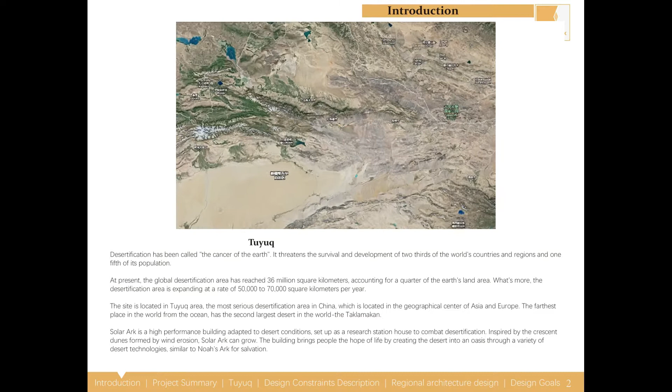Desertification has been called the cancer of the earth. It threatens the survival and development of 2/3 of the world's countries and regions, and 1/5 of its population. Our site is located in Tuyuq, the most serious desertification area in China, which is located in the geographical center of Asia and Europe, the farthest place in the world from the ocean. It has the second largest desert in the world, the Taklamakan Desert.

Tuyuq is the most mysterious place in western China. It's the intersection of many famous religions, history, and culture in the world. It's named famous village of China history and culture, and the oldest existing Uyghur village in Xinjiang. Sunshine is abundant. Heat is abundant, but extremely dry. Rainfall is scarce. Here are some pictures of Tuyuq. These are some industries, environment, culture, and animals in the desert.

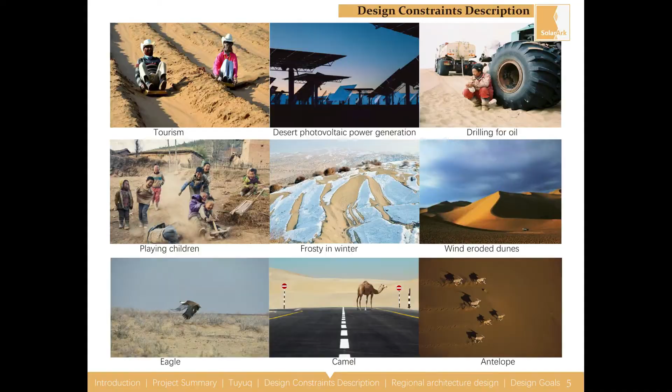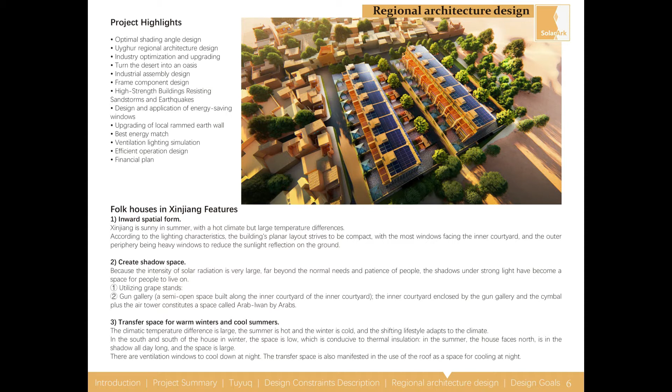This design aims to provide a solution strategy for extreme desert climate conditions and an example of sustainable architecture in desert areas. To develop desert cities and make full use of desert resources, and to adopt a variety of building techniques to avoid the adverse effects of desert climate.

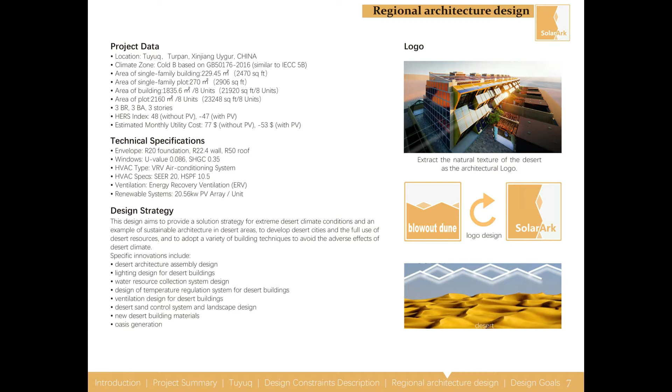Logo generated from extracting the natural texture of the desert as building facade, which comes from blowout dunes formed by wind erosion. After 90-degree rotation, the wave-shaped facade of the building is obtained, which can realize self-shading in summer and sufficient sunshine in winter, with both form and function. The goal of the design is to meet the requirements of the Solar Ark, like the camel, the shape of the desert.

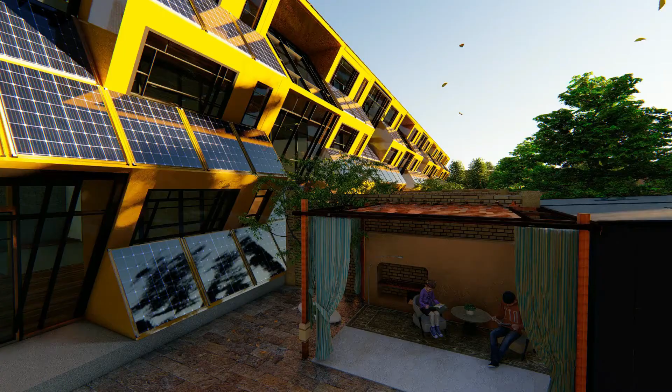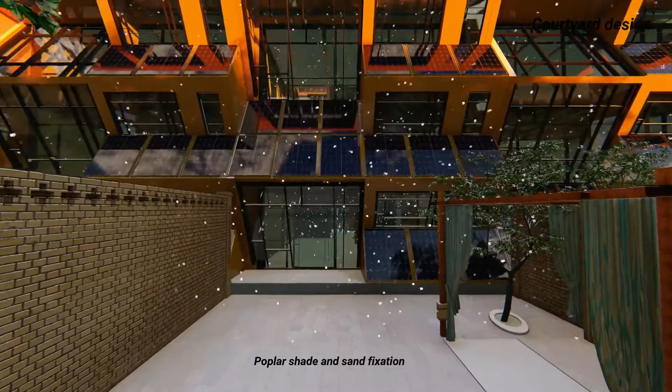Architecture. The vineyards in the courtyard satisfy the local people's living habits. People can barbecue and enjoy the cool air. Mulberry and poplar are planted in the courtyard. They are the original local trees. Poplar has a good effect on resisting sandstorms. The luxuriant branches and leaves of mulberry can provide shade.

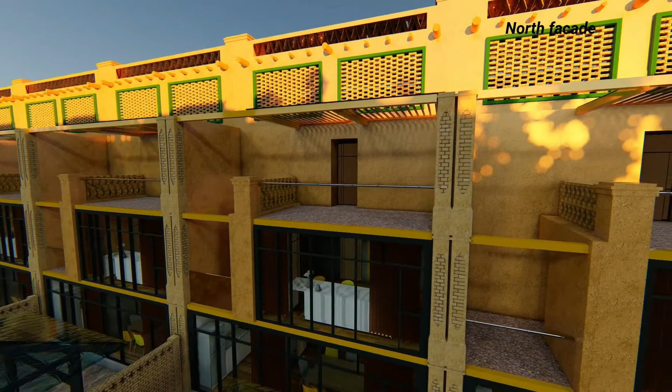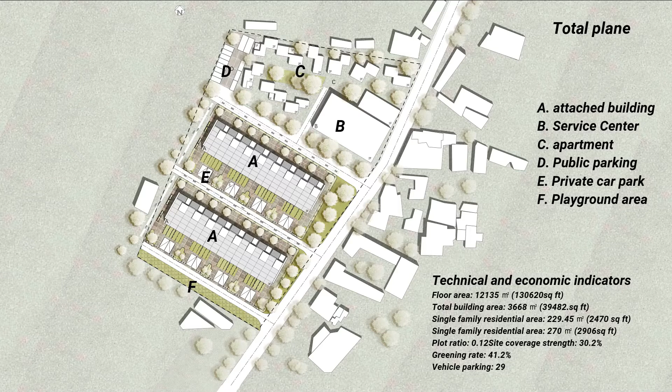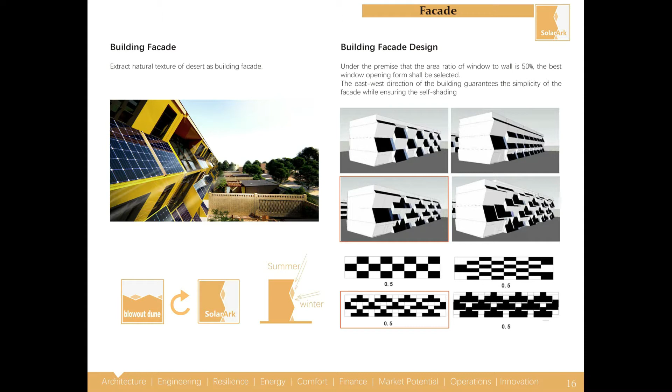A. Attached building. B. Service center. C. Apartment. D. Public parking. E. Private car park. F. Playground area. The natural texture of the desert is extracted as the building facade. The facade is designed to keep the building simple while ensuring self-shading.

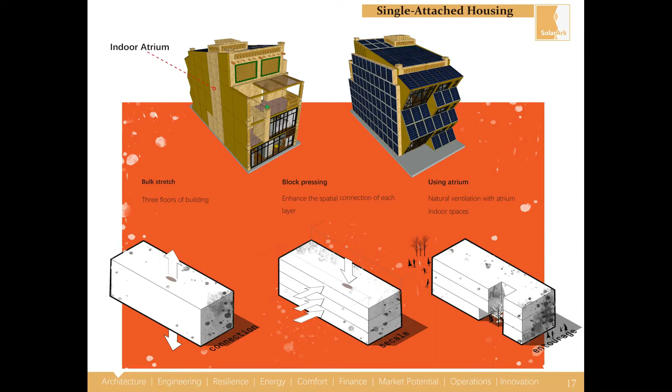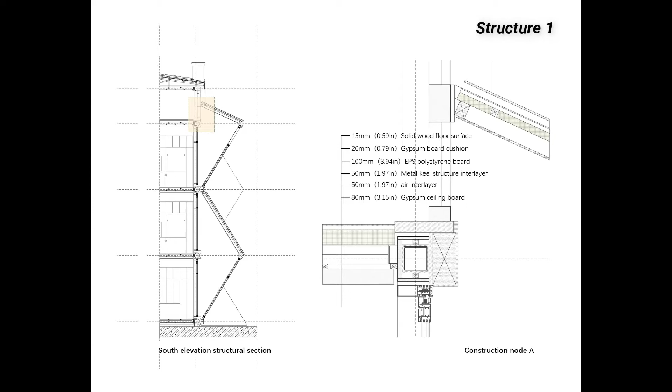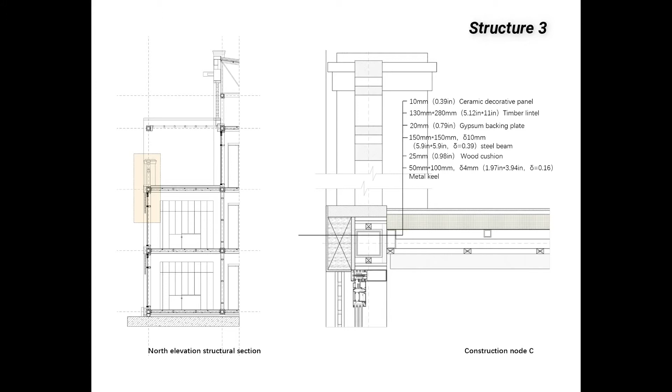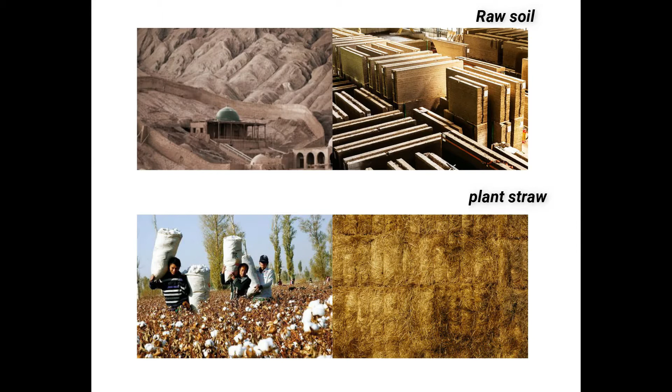Engineering. The main structure of the building adopts a steel pipe. Composite structure is used at its external interface to realize heat preservation and protection, as well as the connection of the complex south facade. And we choose the locally rich raw soil as the building wall material. This material is convenient and low cost, but its bending shear capacity is poor. The improved rammed earth wall has good practicality.

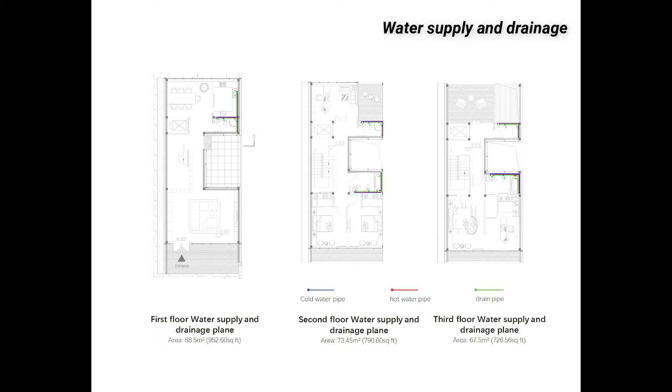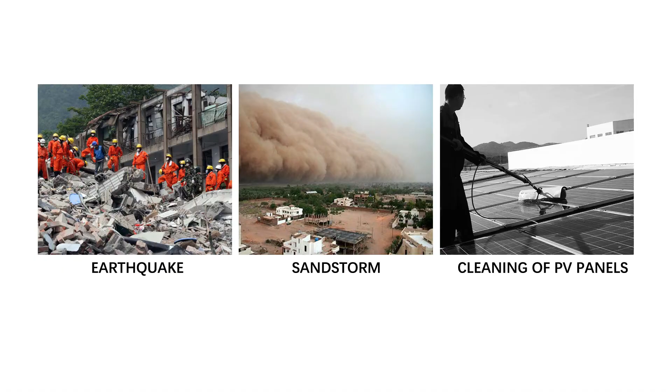Resilience. As for the elastic design of the building, we mainly consider the impact of earthquake, wind, and dust storm on the building, as well as the cleaning of PV panels. The frame member is a patented product developed by us for structural instability in earthquakes. Its strengthening effect on the structure has been demonstrated through many actual projects, and it has the characteristics of lightweight, high strength, and good stability.

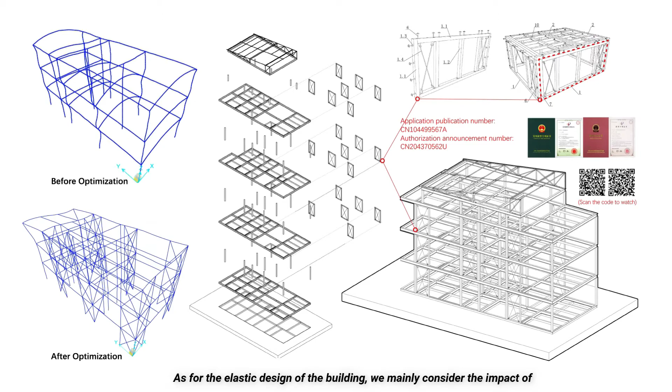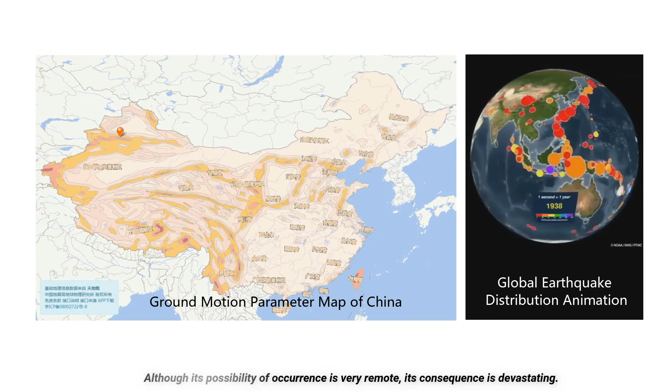The primary risk that our building may face is the seismic risk. Although its possibility of occurrence is very remote, its consequence is devastating. Therefore, we conducted structural analysis to evaluate the building's ability to withstand and recover from seismic activity using the commercial FEM software SAP 2000.

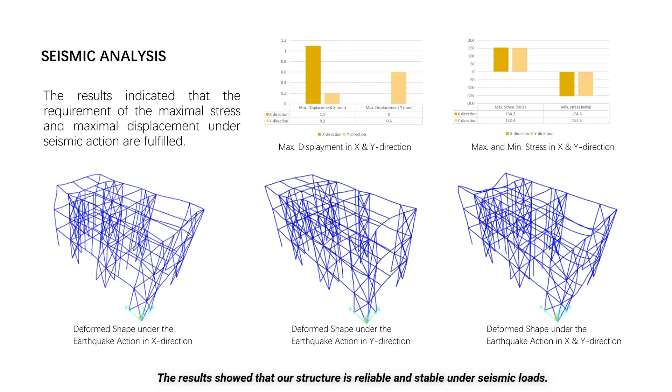By building information model, we can coordinate architectural design with structural design. SAP 2000 can automatically calculate the seismic loads based on the input parameters. We applied the seismic loads in X and Y direction, and their combination, on the steel frame model respectively. The results showed that our structure is reliable and stable under seismic loads.

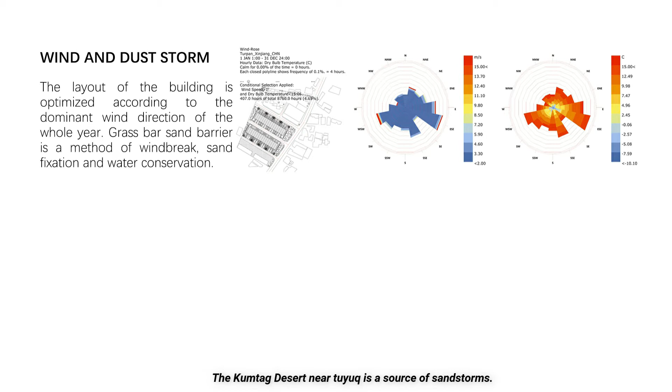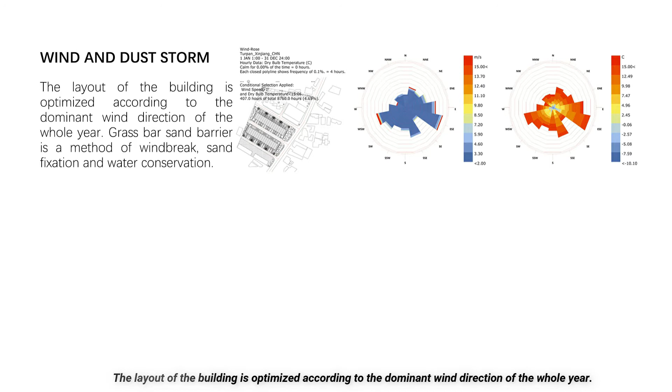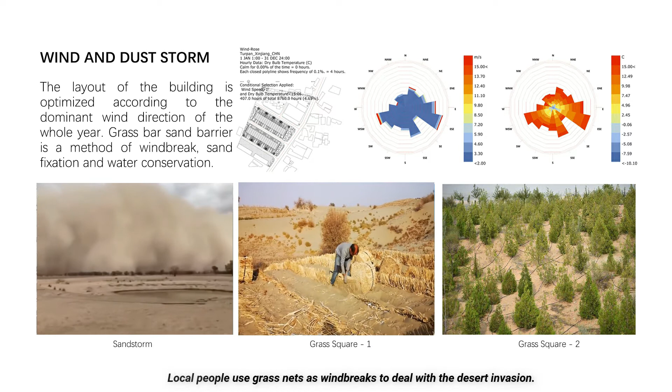Due to its unique geographical environment, northwest China is a sandstorm-prone area. The Kumtag Desert near Tuyuq is a source of sandstorms. The layout of the building is optimized according to the dominant wind direction of the whole year. Grass bar sand barrier is a method of windbreak, sand fixation, and water conservation. Local people use grass nets as windbreaks to deal with the desert invasion.

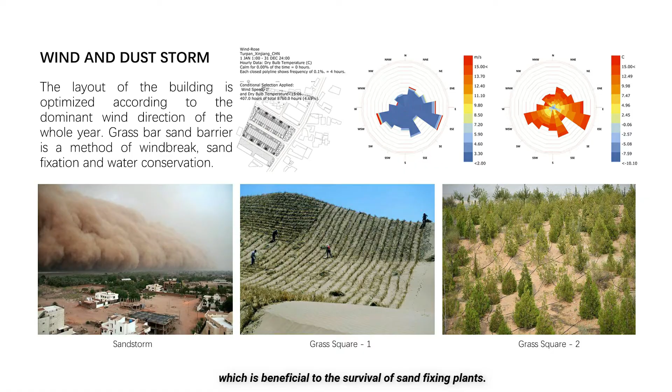On the one hand, it can make the ground rough, reducing wind force and wind erosion. On the other hand, it can retain rainwater and increase the water content of the sand layer, which is beneficial to the survival of sand-fixing plants.

Wind is an important external factor that influences the building's performance. The wind load is applied along all external columns of the frame in both X and Y directions. Furthermore, dead loads and live loads were also applied on the structure to simulate a normal occupied state of the building. The result indicated that the maximal stress along all beams and columns won't exceed the yield stress of the selected steel grade, whether the wind load is in X and Y direction, separately or combined.

In the desert environment, the dust adsorbed on the surface of PV panels easily reduces the system efficiency or even causes failure. In order to maintain the operation of the system, we designed several cleaning and maintenance methods that are easy to operate manually.

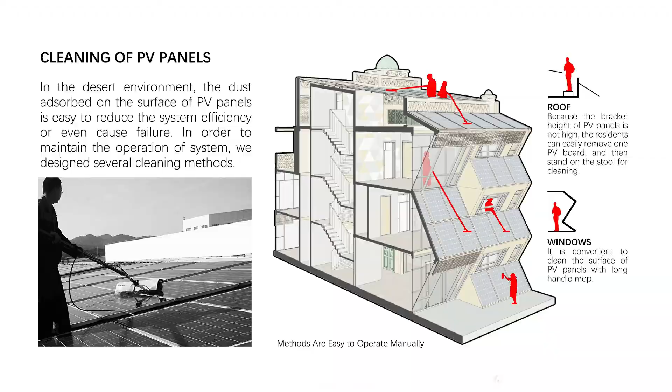Energy performance. Due to REM/Rate software can't set the project location as a non-US town, we refer to Wendover in Utah, US for HERS index calculation. The climate of Wendover is similar to that of Turpan.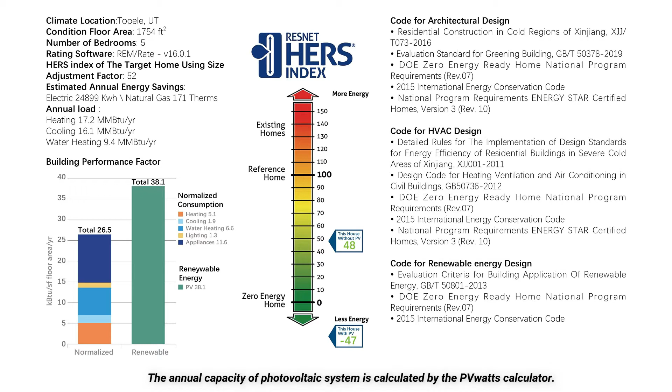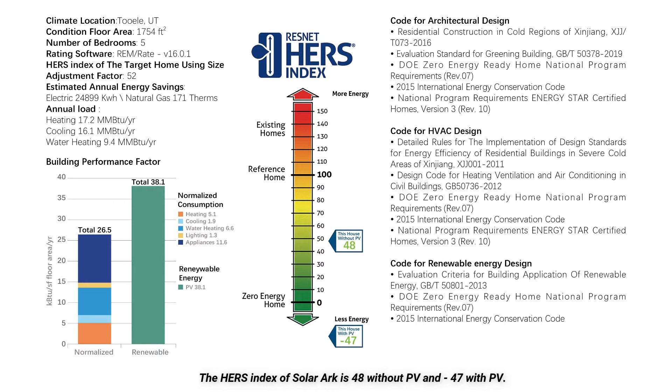The building envelope and HVAC design meet the requirements of DOE Zero Energy Ready Home National Program Requirements and local building codes. The annual capacity of the photovoltaic system is calculated by the PVWatts calculator. The HERS index of Solar Ark is 48 without PV and -47 with PV.

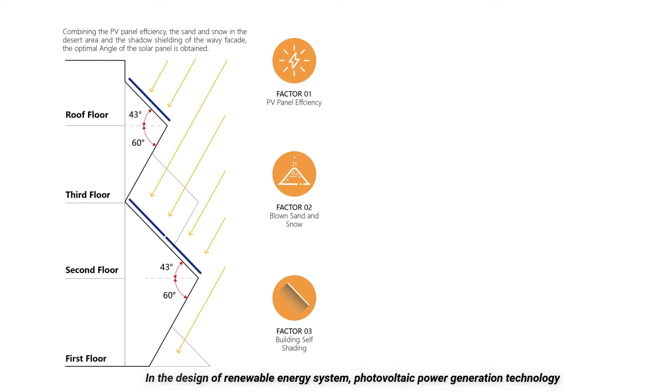In the design of the renewable energy system, photovoltaic power generation technology is adopted in Solar Ark, and an off-grid system is preferred. In the early stage of the scheme design, we determined the optimal inclination angle of the PV panel from three aspects: maximum capacity of the off-grid system, prevention of sand and snow accumulation, and self-shading of the body, which was verified by software simulation.

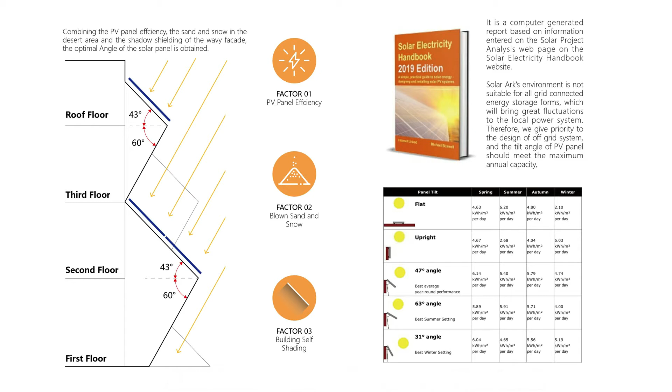It can be seen that the undulating facade can achieve self-shading of the body on the summer solstice, while the maximum area of solar radiation can be obtained on the winter solstice.

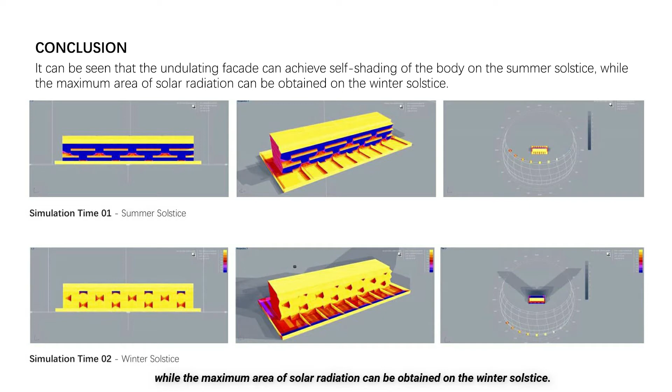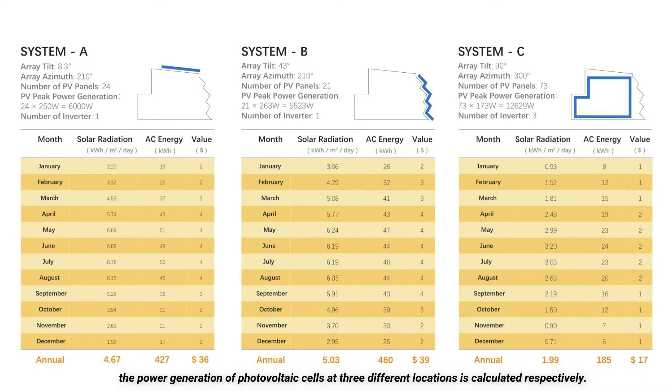Using NREL's PVWatts calculator, the power generation of photovoltaic cells at three different locations is calculated respectively. The PV system diagram is as follows.

The surplus power can be stored in the battery, can also be used to charge electric motorcycles or cars, and provide power for surrounding communities.

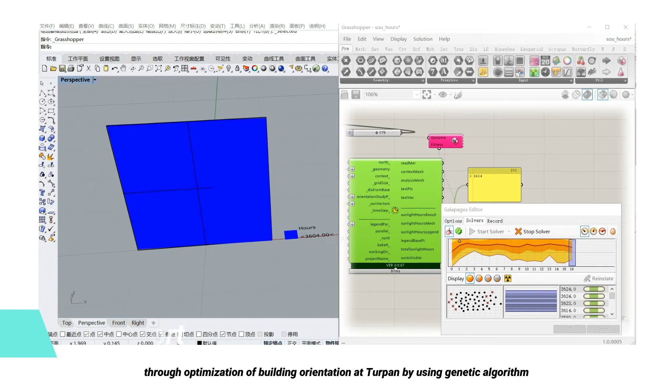Comfort. Through optimization of building orientation at Turpan using a genetic algorithm, it is found that building orienting south is best. An east-west deflection within 25 degrees has little impact on daylighting throughout the year.

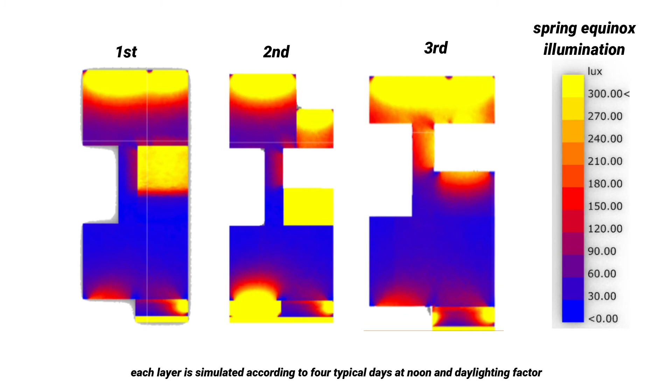Daylighting baselines of 2% daylighting factor and 300 LX illumination are developed. Each layer is simulated according to 4 typical days at noon and daylighting factor, on a work plane at 0.75 meters, to guide the architectural design scheme.

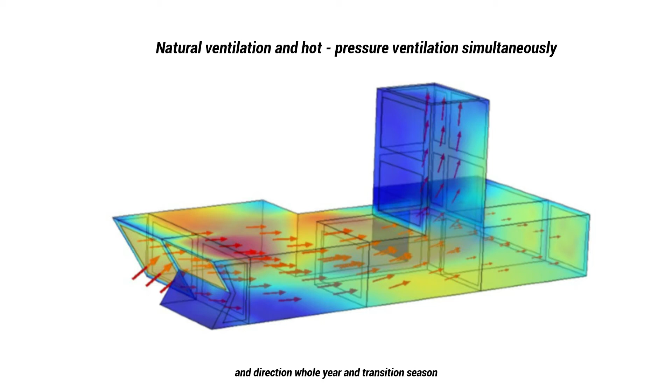Through ventilation simulation based on the dominant wind speed and direction throughout the year and transition season, suggestions are provided for the architectural design scheme and the interior space layout.

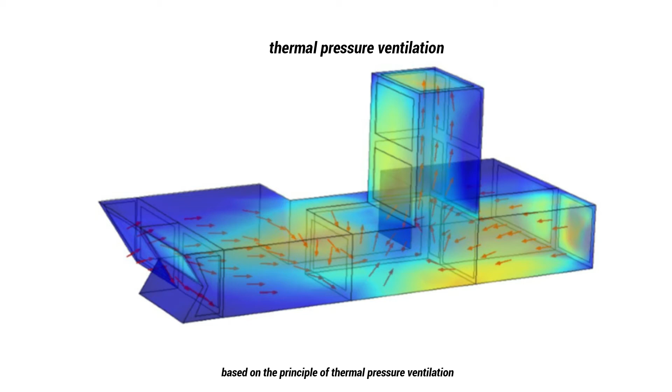When outdoor wind speed is relatively small, based on the principle of thermal pressure ventilation, the atrium drives the airflow in the surrounding rooms. After optimizing the indoor comfort from the perspective of design, air conditioning equipment is selected to further regulate the indoor temperature.

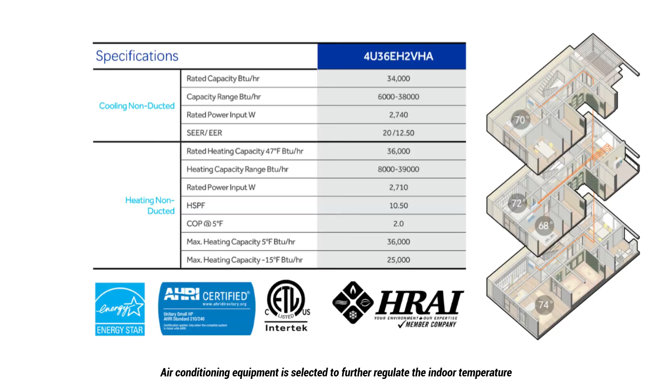Selection of equipment is preferred to use products certified by Energy Star. Indoor temperature is controlled between 18 to 25 degrees throughout the year.

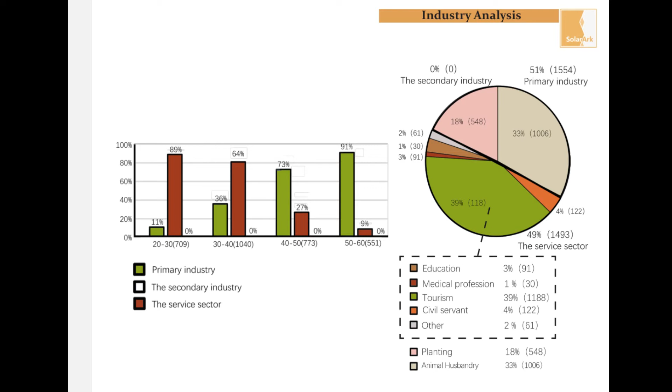Finance. Tuyuku is mainly the primary industry and the tertiary industry, with almost no secondary industry. The primary industry is mainly animal husbandry and planting. The tertiary industry is mainly tourism.

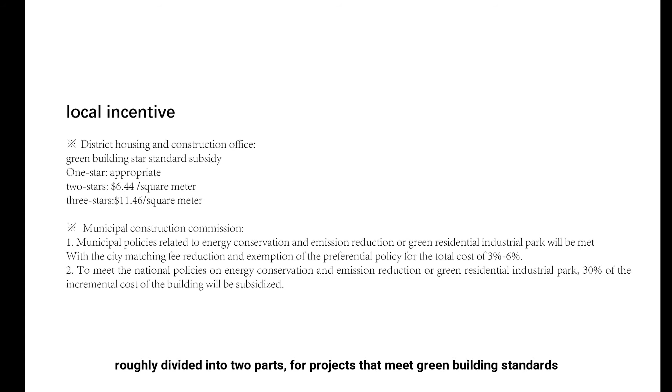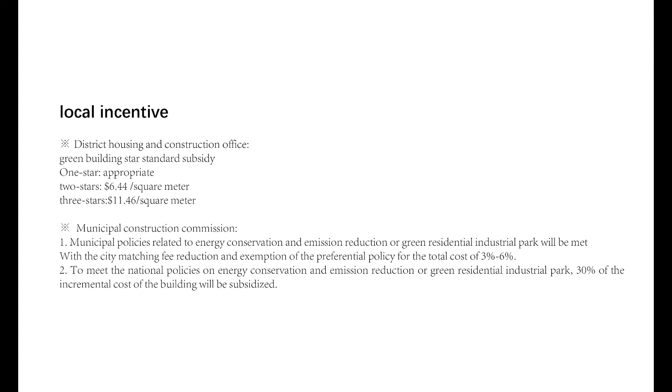The local government in Xinjiang offers generous subsidies, roughly divided into two parts. For projects that meet green building standards, the first is the Housing Department's Green Building Star Standards subsidy. The second is the subsidy from the Municipal Construction Commission.

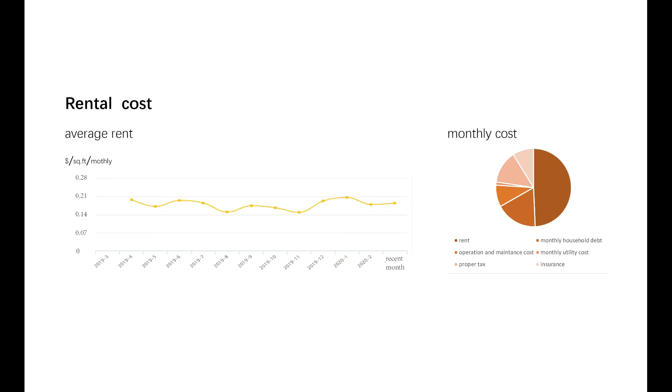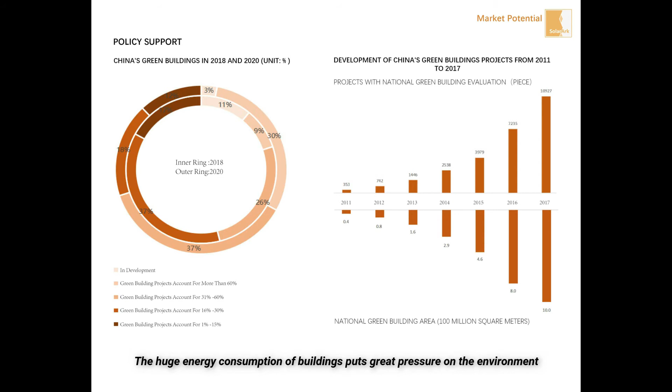Market potential. The huge energy consumption of buildings puts great pressure on the environment. China's green energy-saving buildings are also growing rapidly year by year.

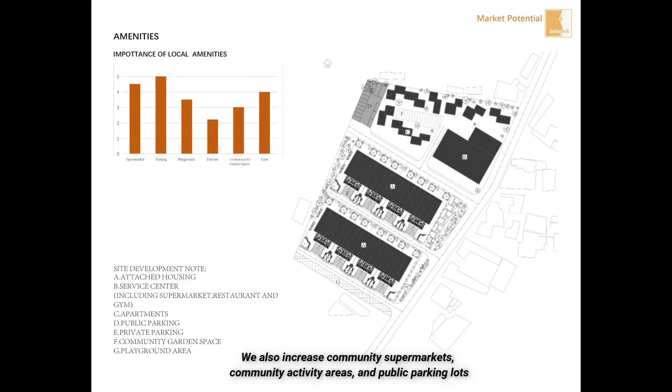The design accommodates the service laundry space, spacious kitchen space, and storage space. We also increase community supermarkets, community activity areas, and public parking lots.

Operation. First, smart home system. Smart home provides a convenient way to integrate all complex functions and integrates the operation of the building into a platform. Second, tracking technology of the building information management platform.

Through the following way, implementation of component information tracking is achieved. Monitor and trace the whole process using Internet of Things technology: component classification system, component divide system, component coding rules, and component lifecycle tracking technology based on coding rules.

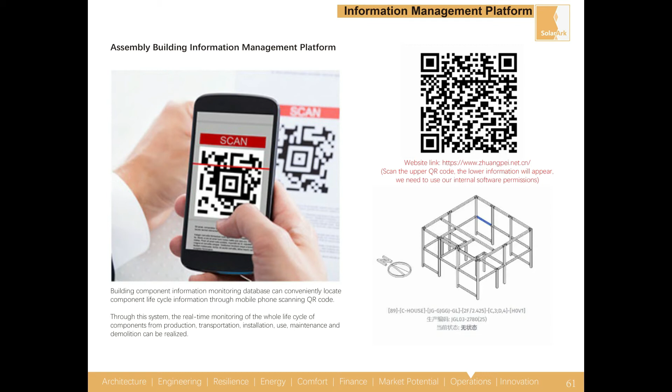Third, prefabricated building information management platform. The information monitoring database of building components can be located conveniently, and the life cycle information of components can be obtained by scanning the QR code with a mobile phone.

The system enables real-time monitoring of the entire life cycle: production, transportation, installation, use, maintenance and dismantling, as well as engineering management and design.

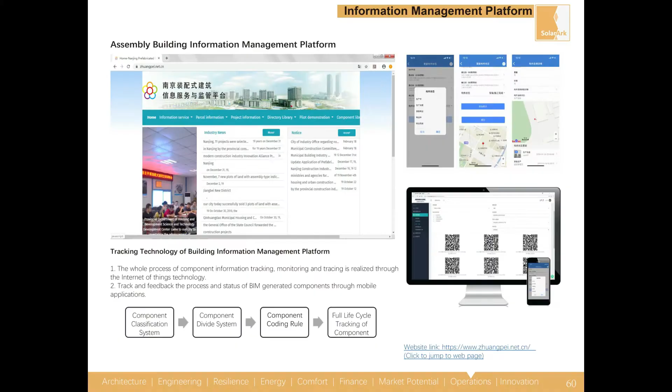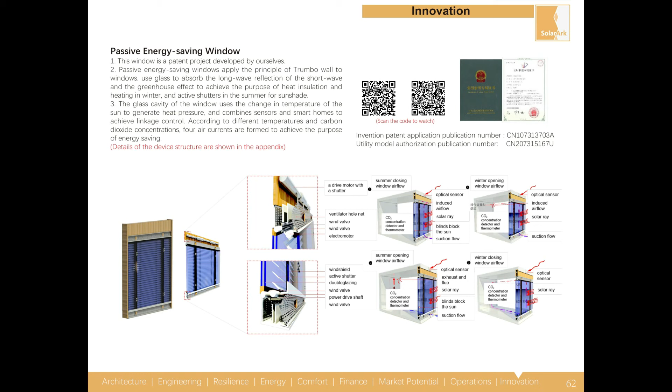Innovation. Energy-saving window. The flow pattern of airflow in winter and summer is as shown in the figure. There are 4 kinds of airflow. These are the structural drawings of the windows.

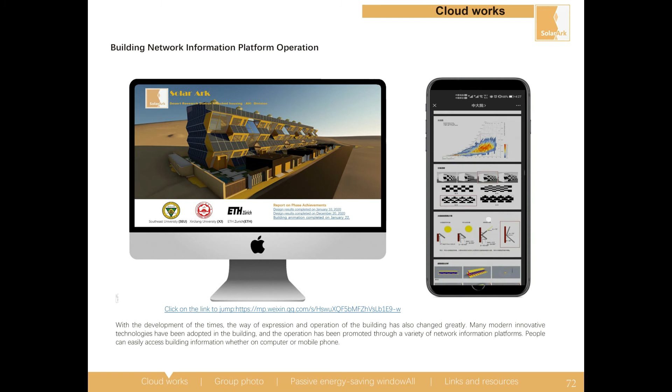We pay great attention to the use of the cloud in this design. First, we made the design course a WeChat official account. Click the link to see it immediately.

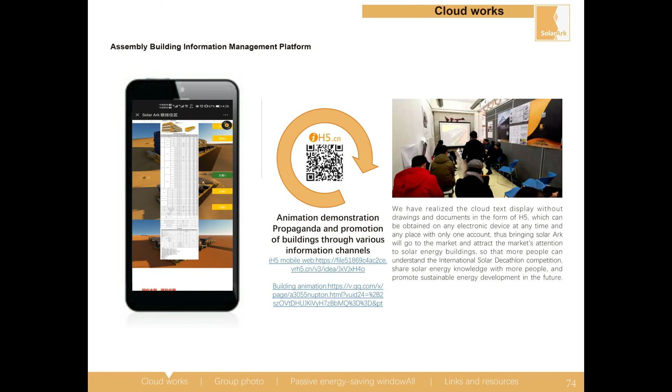Second, we made an H5 file, making cloud text displays available on various electronic devices, which brought Solar Ark to the market and attracted more attention to solar buildings.

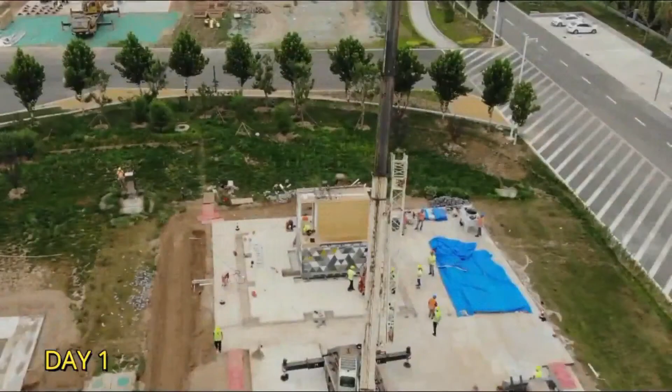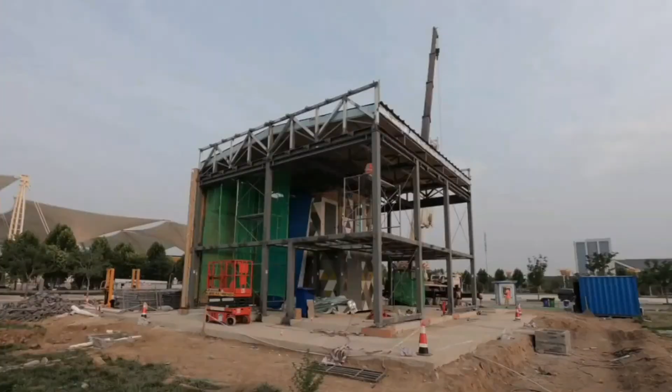In the second China International Solar Decathlon competition in 2018, we built a 200-square-meter building rapidly in 20 days. The industrial assembly type fast building is also our major innovation advantage.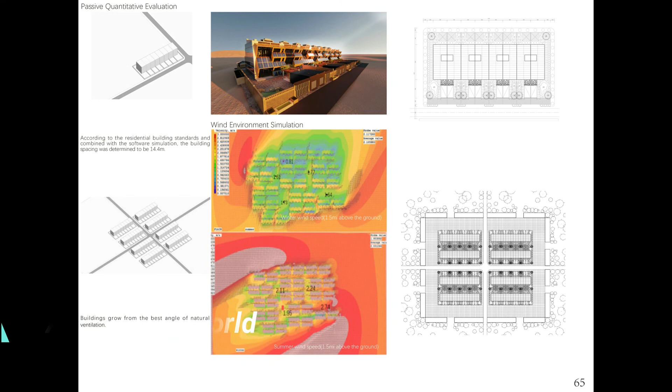Sublimation theme. We are in the same world and face the problem of desertification together. The Solar Arc is expansive, with one building, a group of buildings, and even the building tiled in the desert like a grid, which meets the wind conditions.

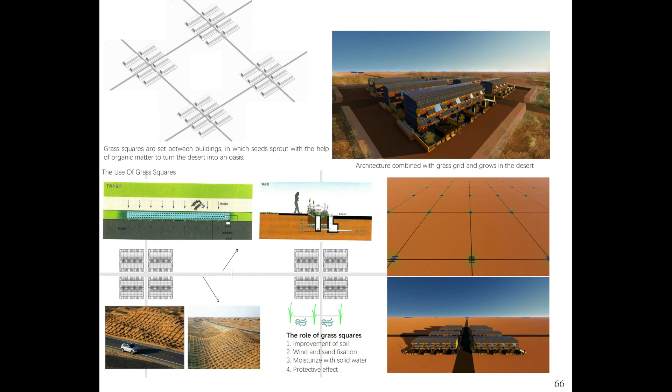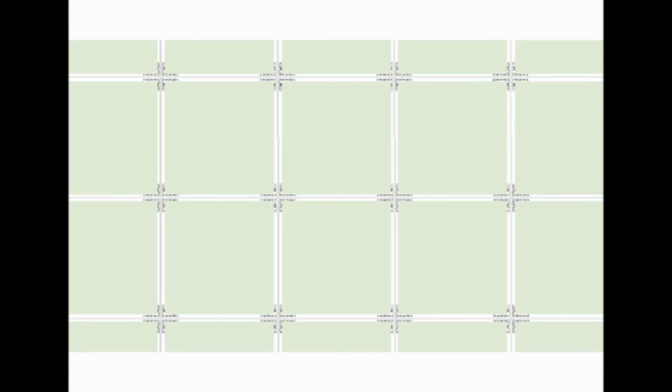Together with the shelter belt of ancillary houses and the grass grid technology between buildings, this forms the ecology. Solar Arc will march into the desert, harness the desert, and finally turn the desert into an oasis.